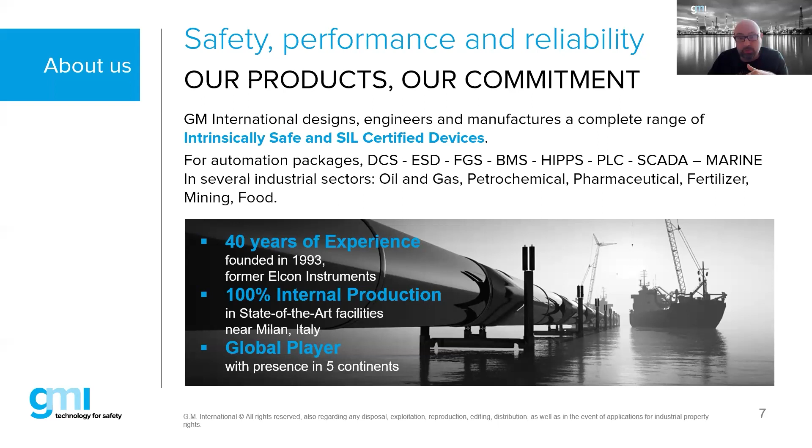We have 40 years of experience in the field. The headquarters is in Italy, where we have our main facility, and where we design, produce, and test all our products.

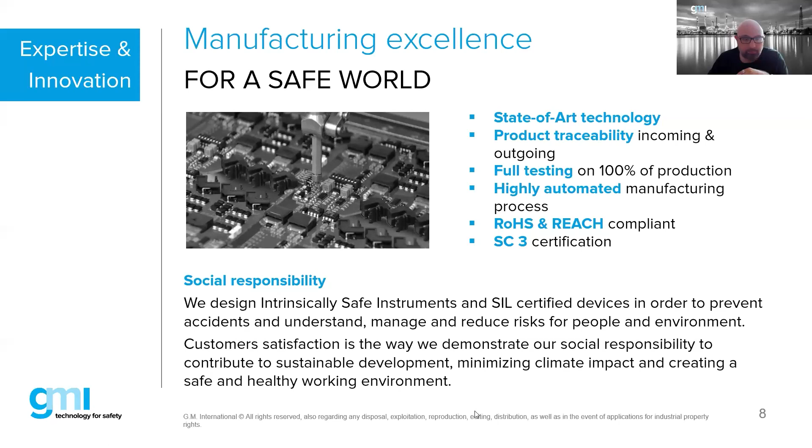Our main office, as I said, is in Italy, but we have offices all around the globe and resellers, so we are available pretty much everywhere.

As I mentioned before, we are a safety company, and we aim to provide safety to reduce risk of hazardous events and safeguard people, assets, infrastructure, production processes, and the environment too. For this reason, the quality aspect of our product cannot be overlooked.

We design our product, we manufacture and test 100% of our devices internally, meaning we do not outsource any of these tasks. What we see here on the screen right now is the portfolio.

Introducing a little bit our products: we have intrinsically safe barriers, safety relays, certified, SIL certified, with and without line monitoring for energized-to-safe or de-energized-to-safe applications. We have isolators, AX power supply systems up to SIL 3. We have temperature and digital multiplexers for zone 1 installation.

We also have customized termination boards for easy connection to the main PLC and DCS systems. We have HART multiplexers, surge arrestors. We also provide consultancy and share our expertise through courses related to functional safety and intrinsic safety.

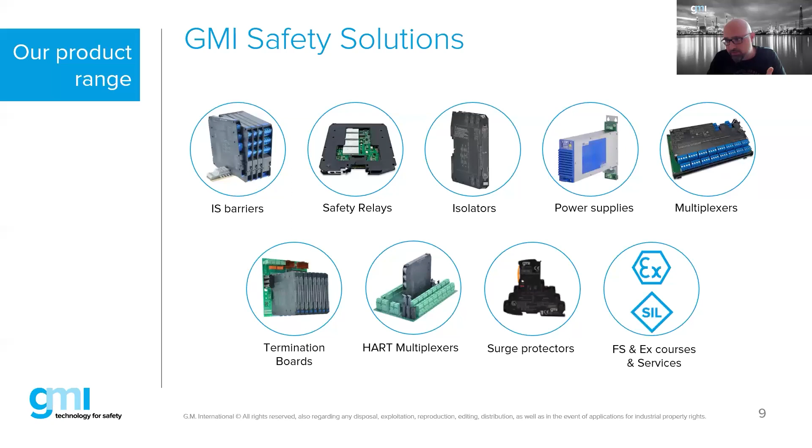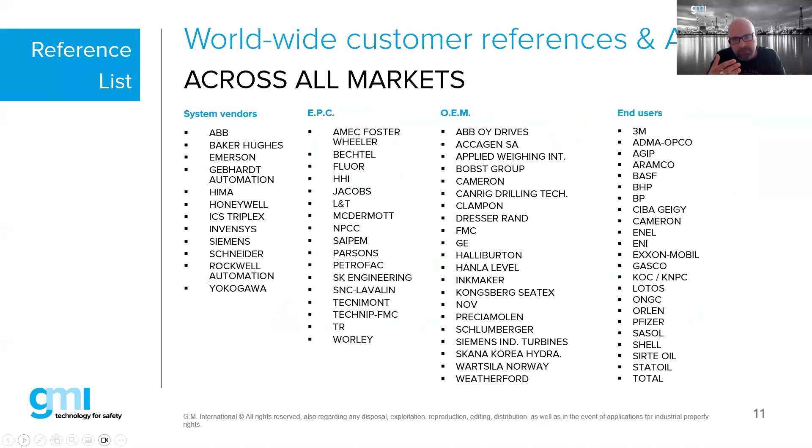This last slide is about our customers, just some of them, from system vendors, EPC, OEM, and end users. And that's all about the presentation of the company.

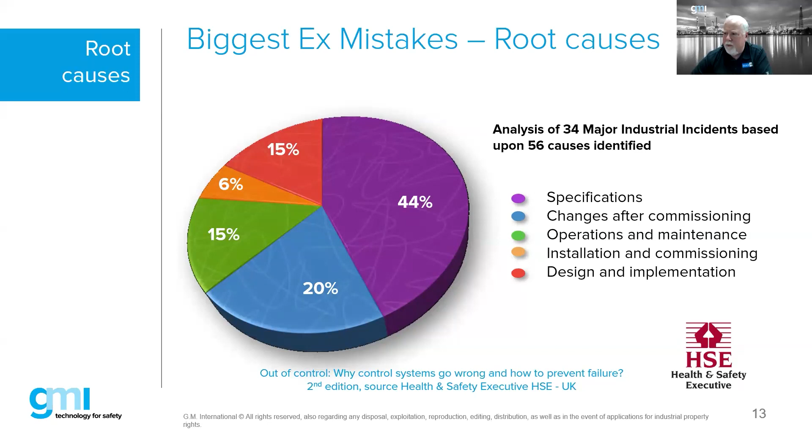So be aware of that. It's one of those things where a lot of the problems I see actually come from very, very early on. We want to make sure we catch those errors before it gets into the construction phase or operational phase. So how do we define mistakes, right?

Fortunately, what do we use as a tool to identify all of the potential pitfalls and problems that we could see with EX equipment? Fortunately, we have a bunch of standards that we can follow, but the 60079-17 standard is really the go-to, if you will, because this is an inspection standard.

So any piece of EX equipment that gets put into service, the requirement based upon the 17 standard is that you have to do an initial detailed inspection on this particular piece of equipment. So that's where we typically find these mistakes—usually at the very last moment before it gets deployed.

We want to try to catch those mistakes, however, before we get to this stage, because this is always, again, when equipment is ready to be installed—it's at the last moment, we're ready to ship this equipment, or we're ready to energize it. We don't want to have these kinds of issues at this particular point in time.

The good thing is that pretty much around the world, regardless if you're in Europe or the international world or in the United States, Canada, anywhere in the world, we pretty much follow the same standard in a variation. Even in the United States, we have published a UL 60079-17 inspection standard. Now, this only applies to zone-rated equipment, but we're also currently working on a new UL standard for inspection of division-rated equipment. So that's something forthcoming that you're going to find.

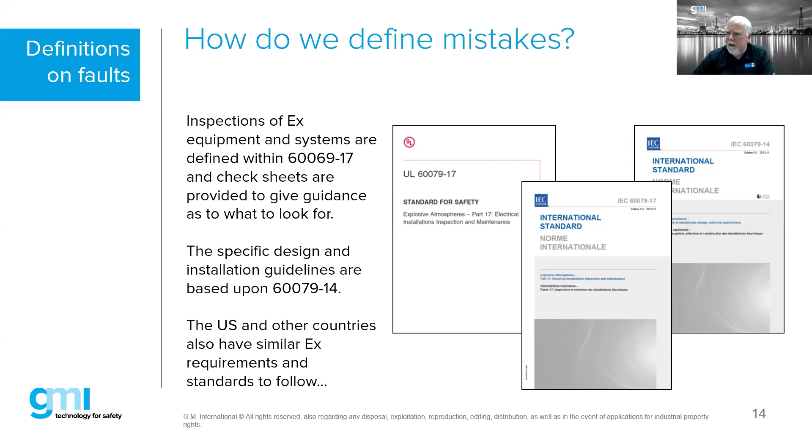So a little bit about what the inspection templates look like, if you haven't seen them out of 17—this is kind of what they look like. There are inspection tables for various protection concepts, and we use these to go ahead and check things out.

Now, an EX inspection is different than a traditional FAT or something of that nature. In an EX inspection, what we're really trying to find is whether or not the equipment is a potential ignition source. When I'm going in and doing an inspection, I don't really care whether or not the equipment works—that's secondary to me. If it doesn't work, hey, it doesn't work. As long as it's not an ignition source, my job is okay, but that's not necessarily what you really are wanting to do. You want to make sure, obviously, the equipment is operational, and that it's safe to be used in a hazardous location.

So the important thing to note on this too: is it just the inspectors that need to know this? In reality, I tell people no, it really should be something that everybody should understand, because this makes life so much easier, especially if you're building skid packages or you're responsible for the design of these packages.

You want to know what the inspectors are going to be looking at so you can anticipate that, and maybe actually do your own inspections and catch all of these mistakes before they get caught by your client or another third party.

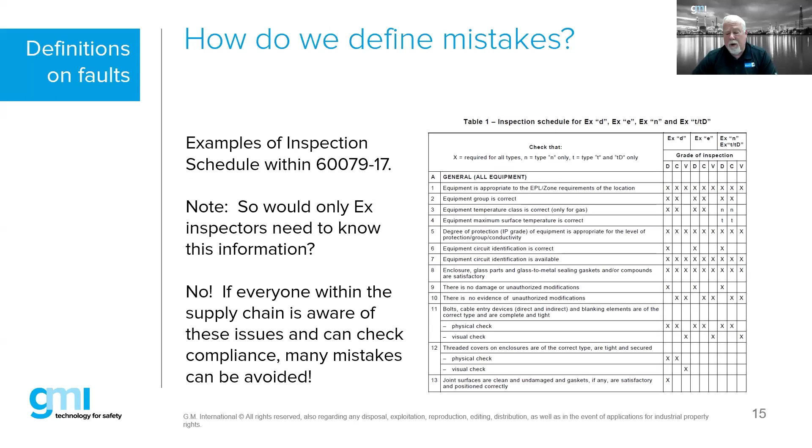It's broken down into visual, close, and detailed inspections. Typically these initial inspections we do are always what's called a detailed inspection, meaning we're opening up the equipment, looking inside and outside. We expect the individual doing this should have an electrical background. There are also ongoing inspections from a maintenance perspective, which can be a visual or close inspection, where we're just literally looking at a product for obvious damage. That's more of an ongoing situation.

So what's one of the biggest mistakes I see? This is one that's pretty obvious, something we'd think we should all catch, right? But invariably, I've seen this so many times, where the equipment is not suitable for either the zone, the gas group, the temperature code, or the ambient. A lot of that information doesn't necessarily get relayed early on in a project scope, so the manufacturer is trying to comply and they're guessing. We need to make sure we get this information out to our vendors and make it very clear.

What is it about this particular equipment? Where's it going? Is there a minimum IP requirement? Are there particular environmental conditions? One thing I see a lot is ambient. The standard product ambient is -20 to +40. If equipment is not marked, that's the default. But in many parts of the world, up north where it gets really cold, -20 can get down to -30. And +40 degrees - it'll be above +40 here in Houston this afternoon. So if I've got a project in the Gulf of Mexico or anywhere in South America, +40 just isn't going to cut it. We have to pay attention to that too.

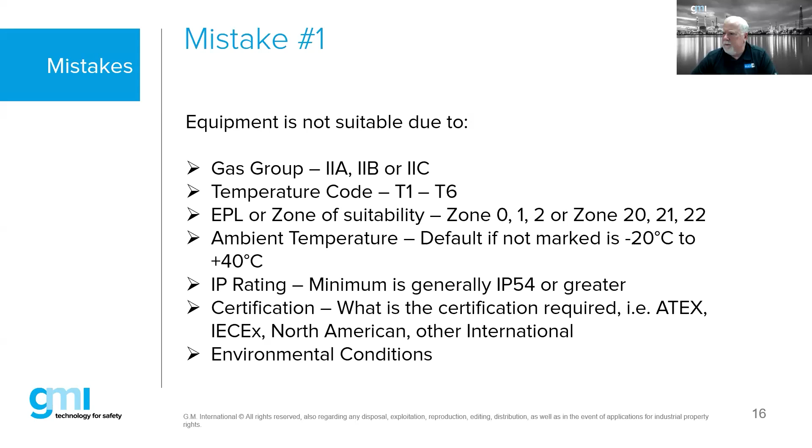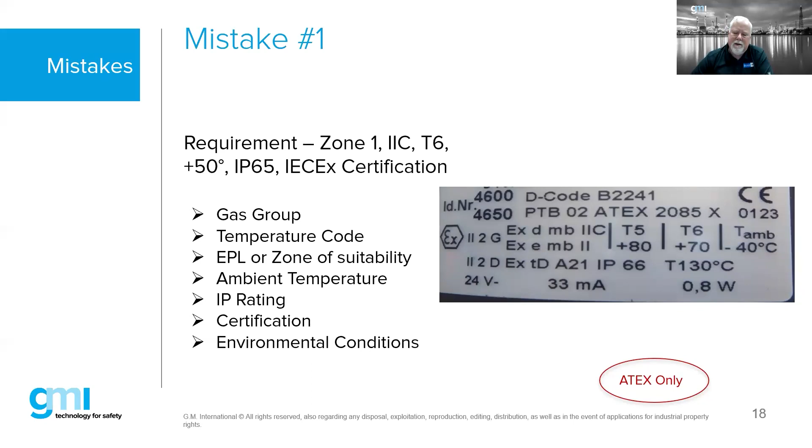Looking at another label, again using the same basis - Zone 1, IIC, T6, +50 degrees, IP65, again needing IECEx certification. There's a couple issues here - actually ATEX is the main issue. We don't have IECEx on this. We're suitable for the zone, suitable for the gas group, suitable for the ambient temperature, and suitable for the temperature code. But again, in this instance, it's not certified correctly for the application.

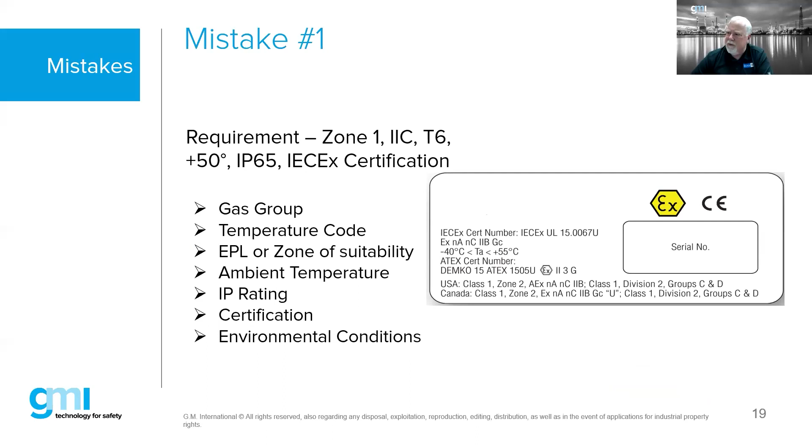In this instance, again using the same basis for our project, this product has a couple issues. Number one, it's only suitable for Zone 2 applications based on the protection concepts. It's only suitable for a IIB application, not IIC. The big thing is, in this instance, this is a component-certified product - we know that because there's a U at the end of the certificate number. That means this product cannot be installed as a complete assembly, it's part of something else. So if I see this, it's again a product that would have to be removed, or undergo some sort of field evaluation and recertification. We want to stay away from this and not use it unless it's part of an overall assembly that's going to be certified as a complete assembly.

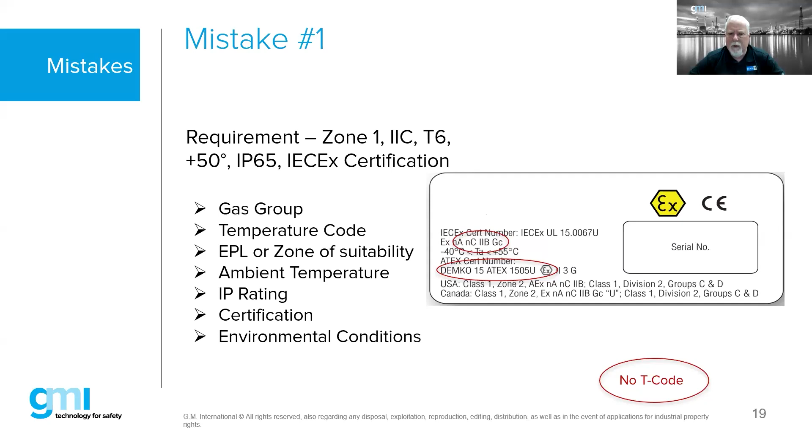Another hint: when you see a product that doesn't have a T code, such as this one, that means it's generally going to be a component certified product. We don't assign it a T code because we don't know exactly how this is going to be installed, since it's going to be part of something else and may have other components right next to it. Therefore, the T code isn't something we'd put on this product because it's a component.

On this one, we need to look very closely, but we have some issues. In this case, it's not suitable for IIC applications, and it's not suitable for T6. It does have an IECEx certification, it does meet IP65, and it does meet plus 50, but we have two strikes against it. So in this case, again, we could not use this particular product.

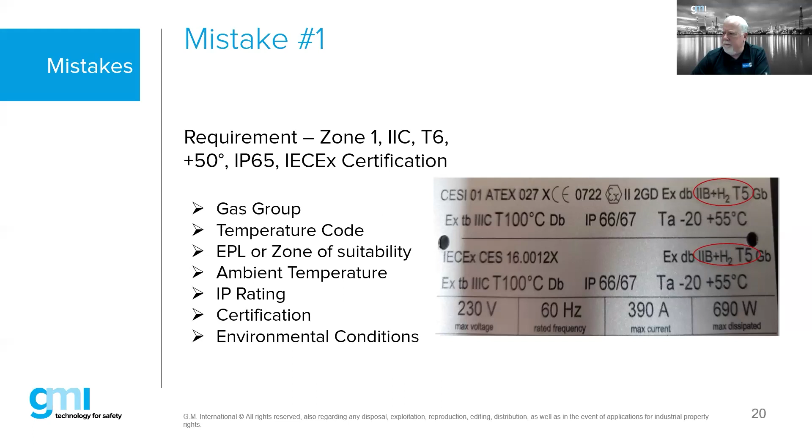So these are all examples of products that could be selected, installed, and everything else, and at the last minute we literally say, hey, this is not suitable for the environment. This is a pretty common mistake, and it's something no amount of field technicians doing installations could fix. This is done very early on, during the selection of products. We have to be very aware of our parameters and make sure our products are suitable before we even start installation and construction.

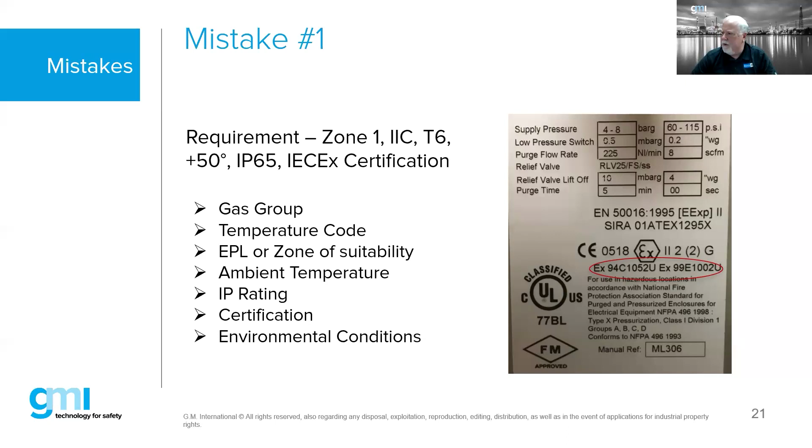And then this is just one last one. Again, no IECEx certification. In this case, it's got ATEX, and it has a U certificate. It's a component, so again, we could not use this.

I do have another one here. This is ATEX only. This has nA. It's Zone 2 only. So again, we would not be able to use this for a couple of different reasons.

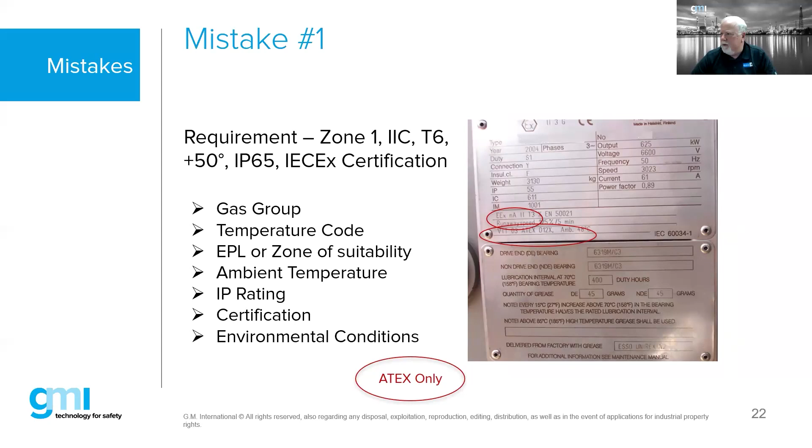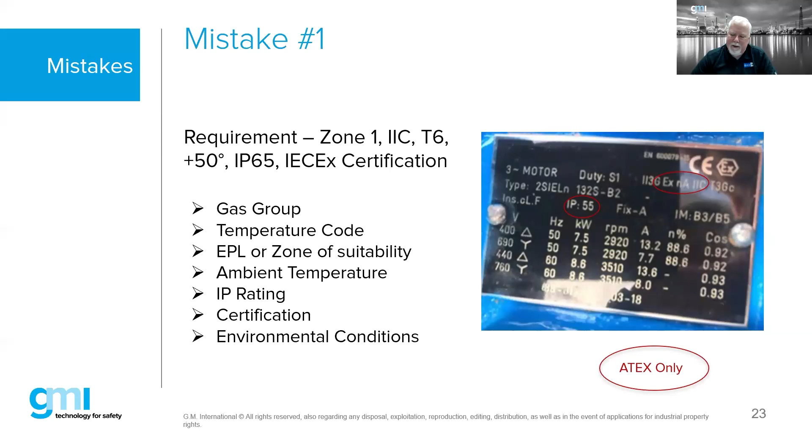These are things we need to take a close look at. I've got another one, another Zone 2 product. This IP rating would not meet the requirements as well. So you can see it's important to understand these labels, and you're going to find all this information in the data sheet from the equipment and ultimately off the certificates.

That's really an important thing I would emphasize to any engineers or designers out there. Before you actually buy anything, make sure you get copies of certificates, because there's a lot of information in there that will tell you certain things. And actually, it's going to be a mistake that I'll cover here in just a minute.

So what is the relevant standard for inspections of EX equipment and installations? I don't know if you can bring up the poll, Gabrielle, or not, but we can skip that.

It is the 60079-17 standard, so that's our inspection and maintenance standard. That's the one where we're going to find the inspection tables. The other relevant standard, important for a lot of people to understand, is the 14 standard. That standard is our design and installation standard, and we will find inspection tables also within 14. But really, 17 is the main standard we want to focus our attention on and make sure that's something we use.

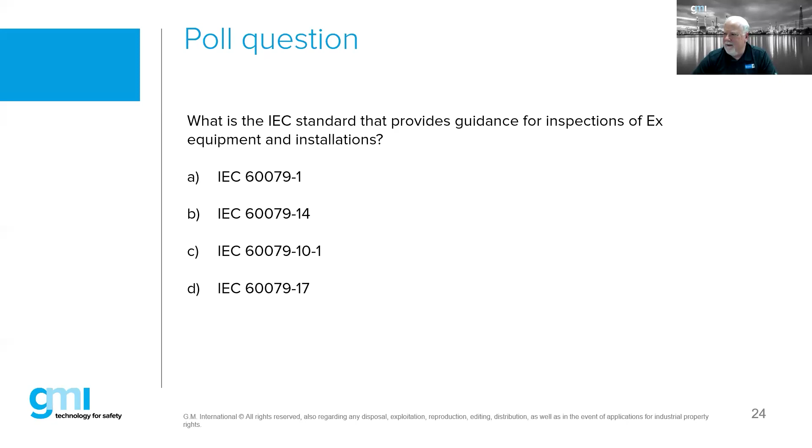So moving on, let's look at, if I can get this to move. Oh, I don't know if it's doing anything. There we go, it did move.

Mistake number two, the second biggest mistake: modifications into EX equipment outside of what is allowed. One of the things I see an awful lot of is additional entries drilled into EXD enclosures. That is a no-no. It cannot be done in the field, it can only be done by the manufacturer.

The other thing is additional components installed in an enclosure, and this applies not just to EXD enclosures, but also to other EX enclosures, because when we get them certified with a certain set of components on the inside, we're assuming those are going to be the components used, and we're going to develop a temperature code based upon this.

If we take and all of a sudden add an additional power supply, or add an additional contactor on the inside of an enclosure, that's going to generate more heat, which potentially violates our temperature code requirement. Also, depending on the placement of this equipment inside, for example, an EXD enclosure, we could introduce what is called pressure piling, a situation in which we have an explosion on the inside of a flame-proof box, but because of the orientation of the components inside, we're blocking an explosion from taking place, creating a potential secondary explosion that can be that much greater than the first.

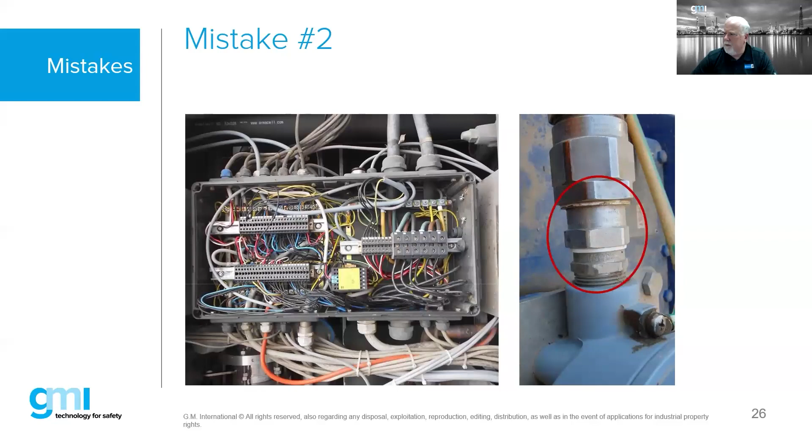Looking at our next slide, if I can get this thing to work—oh, there we go. Now we look at this particular one and say, hey, it all looks good, everything looks fine. However, just by looking at this, those particular glands are not barrier glands, and that may or may not be an issue.

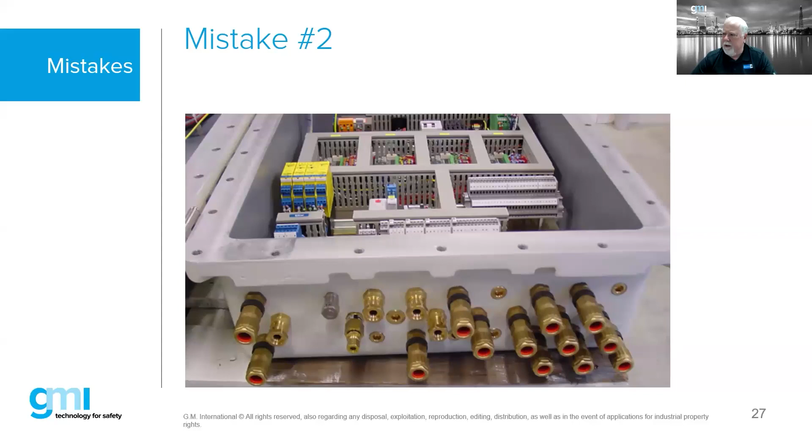So we have to understand, this is a flame-proof panel. What type of cable is being used? What is the length of cable? What is the requirement under the Dash 14 standard with regards to the type of cable, and whether or not we have to use a barrier gland or a non-barrier gland? We don't know that just by looking at this panel right now. We need to know further, as far as the length and type of cable, to determine whether those flame-proof glands are acceptable. So again, just by looking at it, it looks fine, but we're not really 100% sure until we truly look closer at the details.

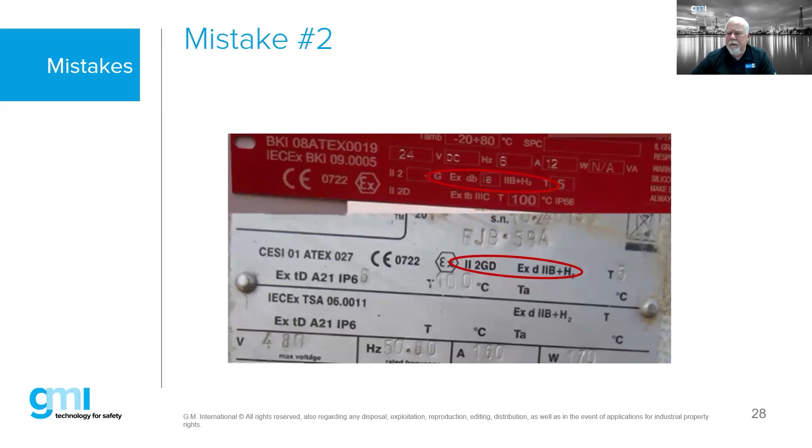And generally speaking, because it's not marked with a bracket IA as associated apparatus output, I'd say, hey, no, this is not right. We'd have to reevaluate it, potentially recertify this panel. So these are little things that you really have to key in on sometimes, and they can kind of trip you up. We want to make sure that we catch this stuff before we start buying things and specifying things.

And by the way, one thing about shrouds, a lot of people - this is more of an opinion, right? I would highly recommend against using cable shrouds, because they have a tendency to hold moisture in against the cable gland. And what will actually happen is that it holds that moisture in, and it'll start eating away at that gland, accelerating the corrosion that'll take place in a marine environment, for example. So typically a lot of clients have gotten away from using shrouds.

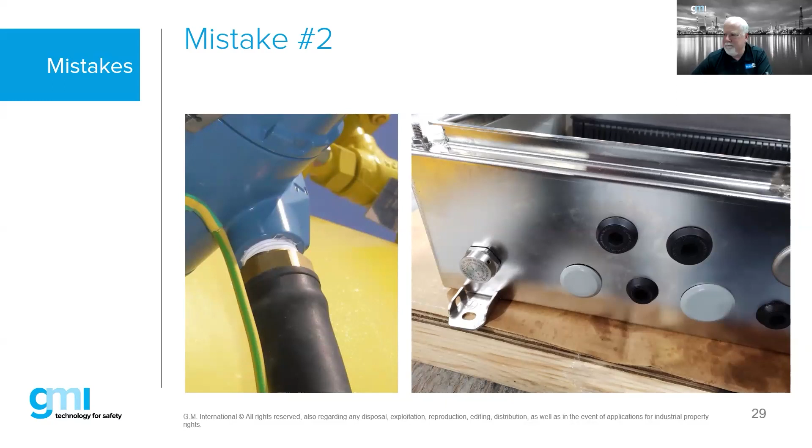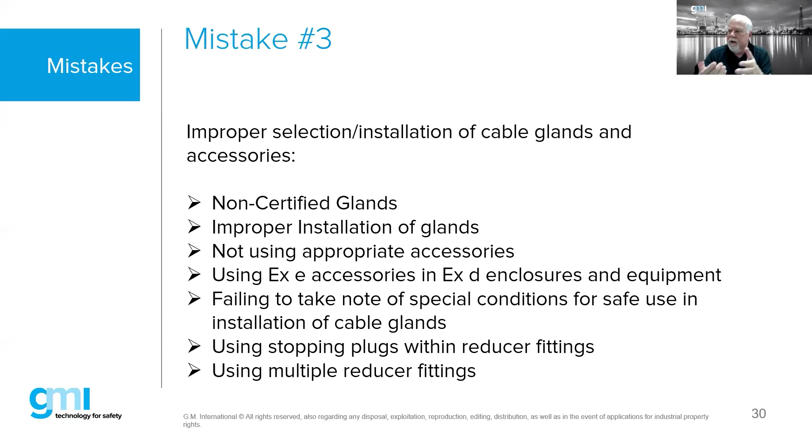Mistake number 3. This does come into a lot of installation details: non-certified glands, improper installation of glands, not using the appropriate accessories, maybe using EXE equipment accessories in EXD enclosures, failing to take note of special conditions for safe use, using stopping plugs within reducer fittings, or using multiple reducer fittings. These are all issues we want to stay away from.

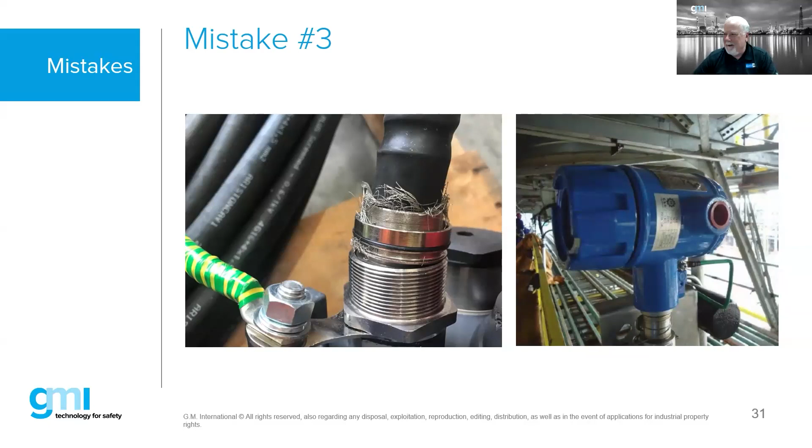On the right-hand side, you see a transmitter with a little red stopping plug. That's a traveling plug that should have been removed during installation and replaced with a certified stopping plug. Those are not too uncommon - we see stopping plugs like that on a lot of equipment. Fortunately, that's an easy fix.

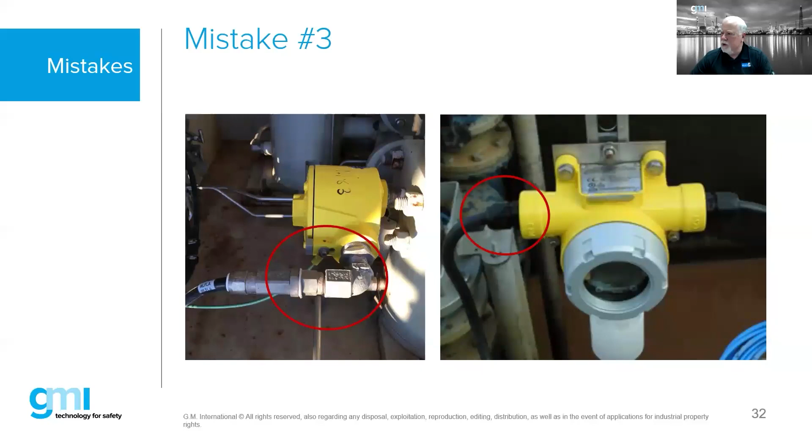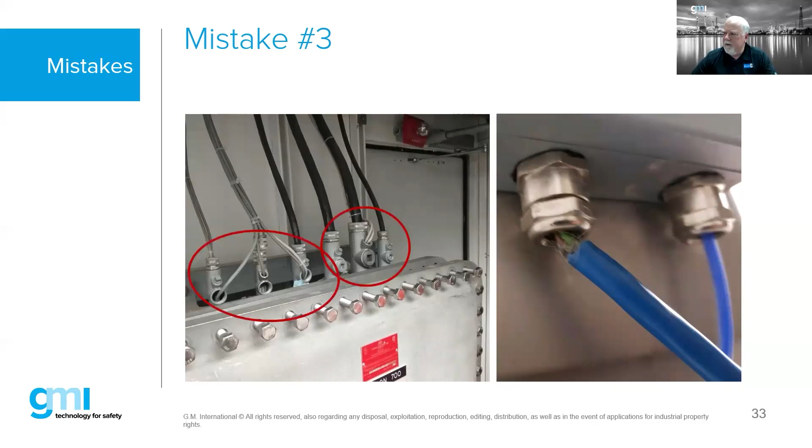In this case, on the left-hand side, those are stopper boxes, or what we call here in the United States seal fittings, and obviously have not been installed properly. They actually require being packed with a compound, a cement-type compound that cures around the individual cores, and they obviously have not done that. And then obviously a cable that is pulling out of a cable gland - so again, these are definitely some installation issues.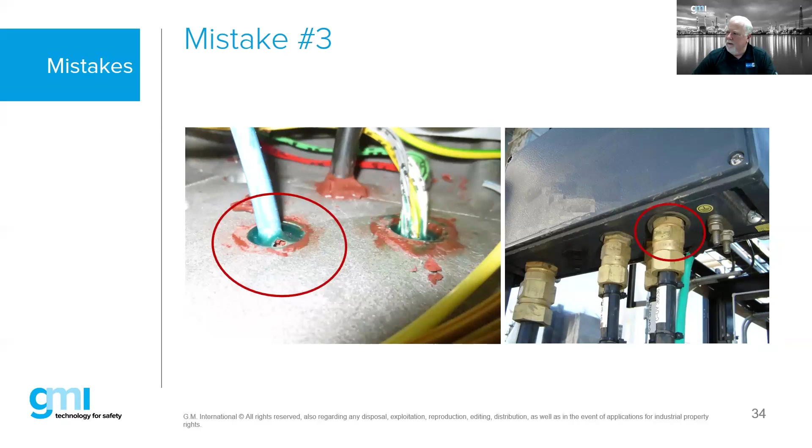So again, some of these are pretty minor. They don't necessarily pop out at you, but these are the things you want to be looking at. Obviously, on the left-hand side, the gland is pulled out. On the right-hand side, we basically have not landed the armor on the inside of the glands. So those are definitely some issues.

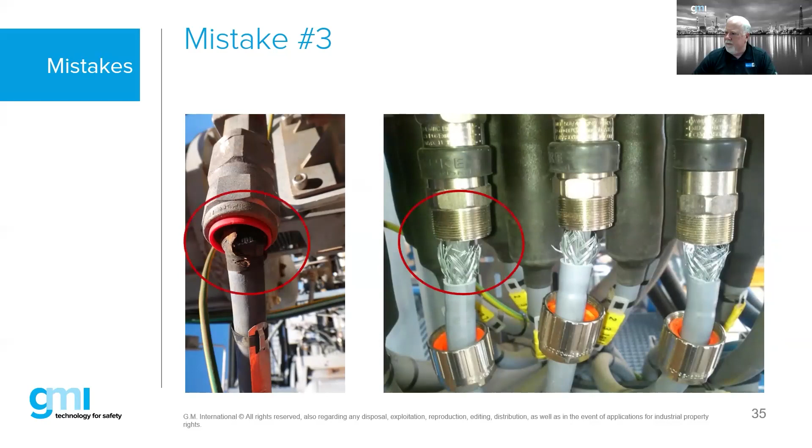Looking further at some others, on the right-hand side we have a shroud that's covering up the steel wired armor coming out. On the left-hand side, I'm not really 100% sure what the problem is with that one. It looks as if everything is okay. We have an IP washer in the appropriate place, we have an earth tag, and it looks like we have some sort of adapter going in there as well. So it may be a situation where we should put an IP washer between the earth tag and the adapter, but in reality, I think that's actually an okay situation.

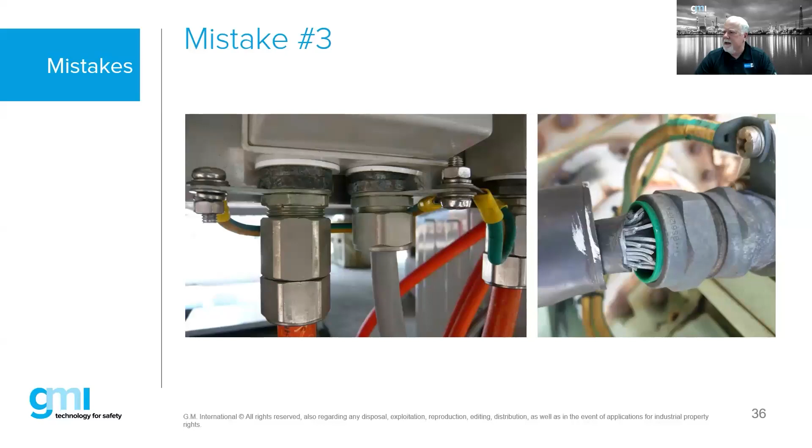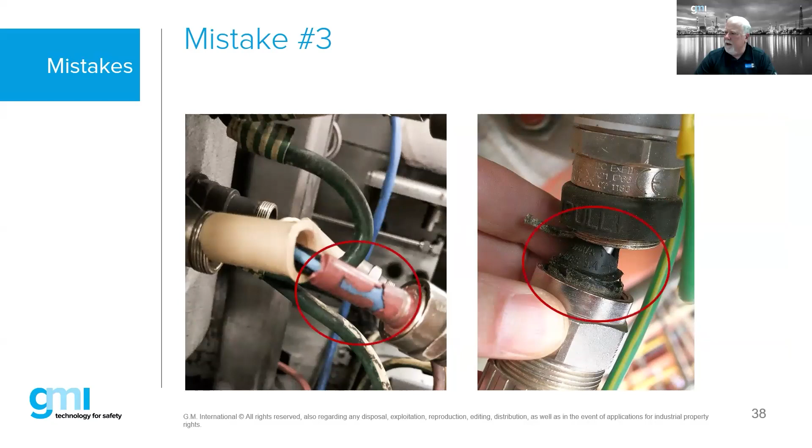And again, some other things, some other glands - these are just some real world pictures that you would see. And then, of course, barrier glands in which the compound isn't properly cured, or maybe the internal seals get torn. These are all kind of examples.

Just ask this question: can you use an EX certified stopping plug in conjunction with an EX certified reducer fitting on an EXD enclosure? Here's where we're taking a stopping plug - maybe we have a hole in a flame-proof box that's, let's just say, an M32. And I have an M20 stopping plug. I don't have an M32 stopping plug, but I have an M32 to M20 reducer, and I'll use that, and then put a stopping plug into that. Is that acceptable? The answer is no. I cannot, on flame-proof boxes, take a reducer and a stopping plug and combine them. I can take a reducer adapter with a cable gland, but if I ever use a plug, the plug needs to be the actual size of the hole of the enclosure.

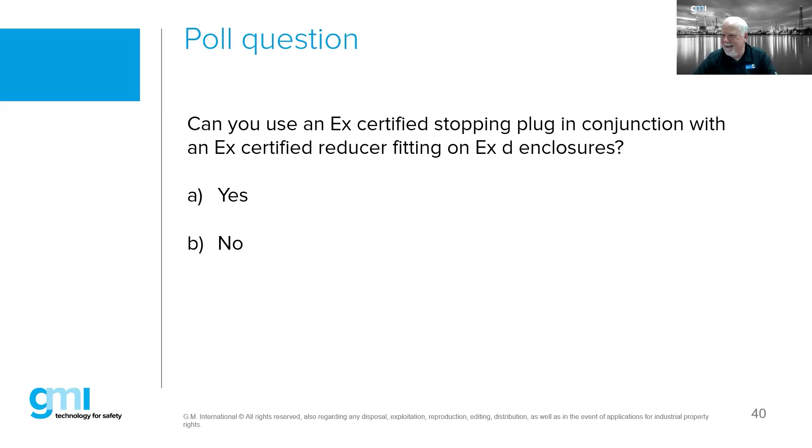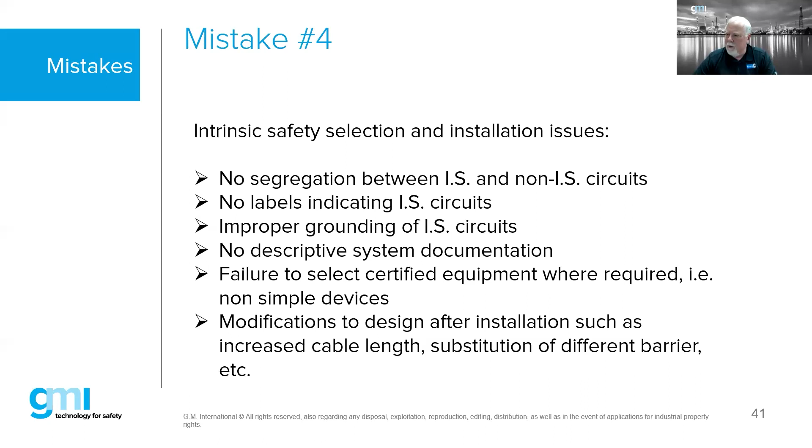Here we go, intrinsic safety - the mistakes on IS. There's quite a few if we get into IS: no segregation between IS and non-IS, no label indicating IS circuits, improper grounding of IS. There is no descriptive system document. There's failure to select certified equipment where it's required. For example, we can use what are called simple devices in IS circuits all the time - they do not require certification, but if the device is energy storing, then it has to be a certified device. And then modifications to design after the installation, substitution of different barriers, or maybe increasing the cable length - those are all issues with intrinsic safety that we need to be concerned with.

So what you see on the left-hand side, again, we have what looks like a combination of intrinsic safety and non-intrinsic safety. We had a partition, with IS over on the right-hand side and non-IS, but unfortunately, when they did the installation, they combined all the cables together. So we have defeated that segregation requirement.

The same thing holds true on the right-hand side where our outgoing is IS and our incoming is at the top, but we've done a service loop on the inside of this panel, and now all of a sudden we're creating all kinds of problems. So we need to maintain a 50 mm separation between IS and non-IS on the inside of our panels. We can do that either by distance, by partitions, or if one or more of the cables are shielded, we can do it that way as well. But in this case, these are just non-shielded conductors running on the inside of panels.

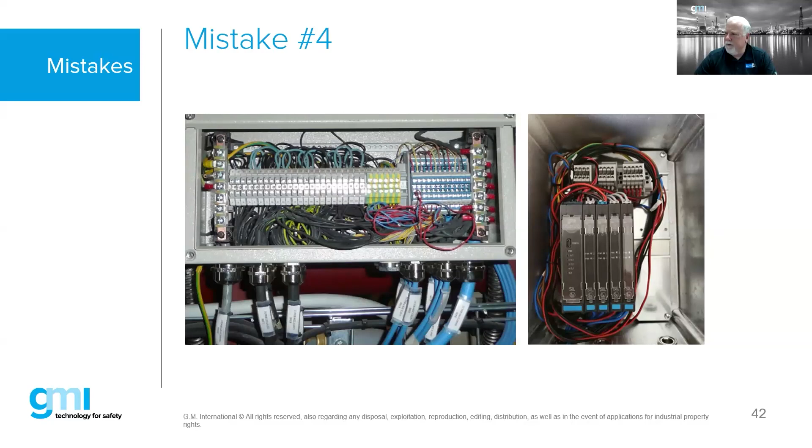And there you see those. On the left-hand side, again, we're running into that 50 mm separation. The same thing holds true on the right-hand side. We have a segregation there between IS and non-IS, but we've somewhat defeated that because of the way that we run these cables outside the output, out of the barriers themselves.

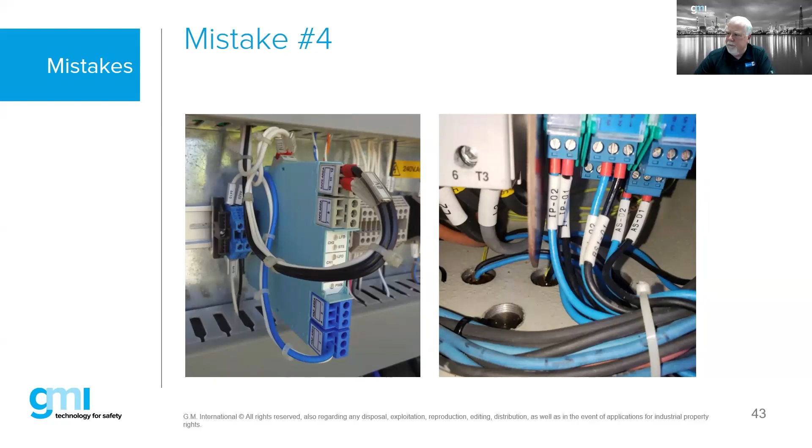There's no real problem with this, other than it's not certified as an assembly. It's only certified as a component. So this is something we want to make sure of when we're specifying or using things like increased safety—we want to make sure we get them as a complete assembly and not just an empty enclosure, thinking we can populate it ourselves and away we go, because that's typically not the case.

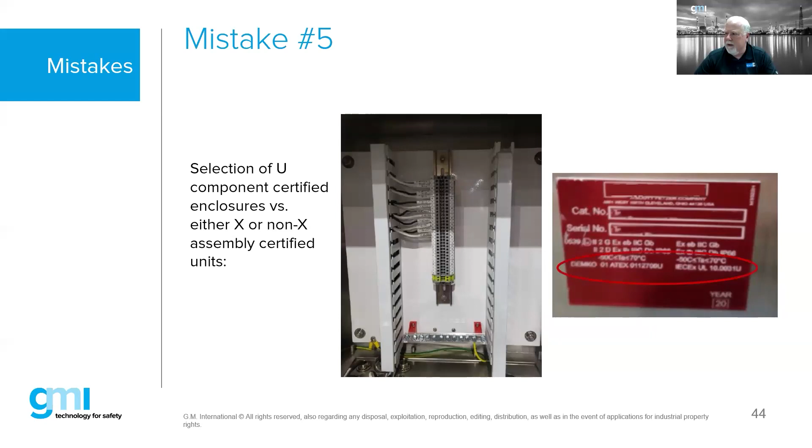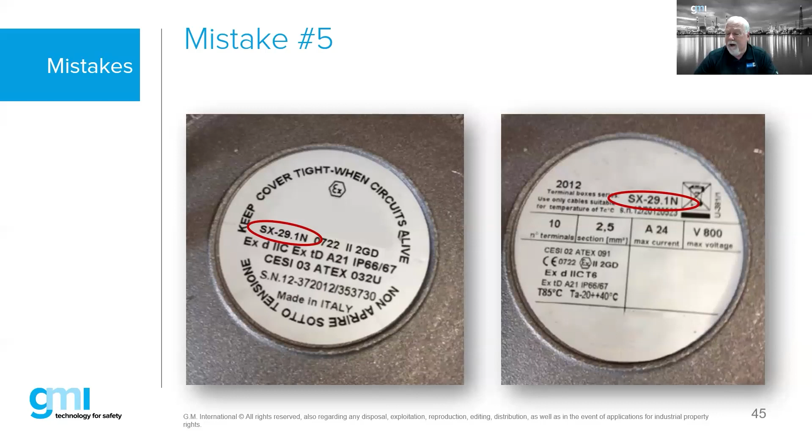This is another example of two small flame-proof boxes that are basically the same part number, but the one on the left-hand side is actually a component certified product. The one on the right-hand side is the same box, except it has terminals. So the right-hand side will actually have a temperature code and a certificate number without a U. The one on the left-hand side, notice it does not have a temperature code and it has a U, so that's an empty enclosure. The one on the right-hand side has terminals. So if we were using this box as a pull box, just not having to put any terminals in it, we could use a U certified box for that application. But if we were to land any terminals on the inside of this enclosure, that U certified box would be rejected.

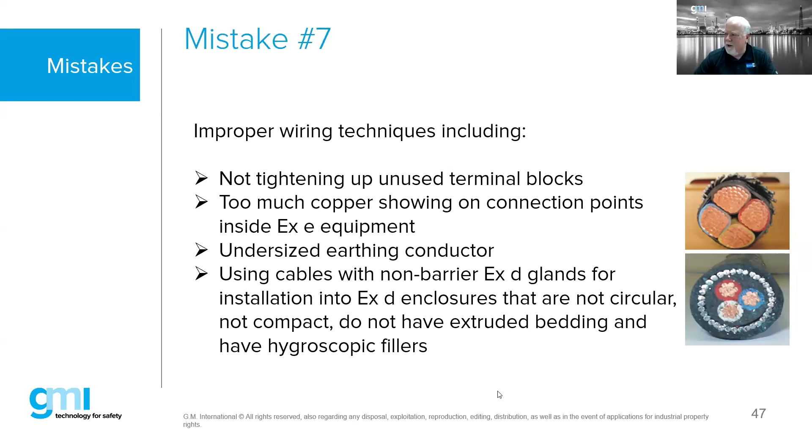Improper wiring techniques. Unused terminal blocks are all supposed to be tightened. Too much copper showing on connection points inside of EXE enclosures. Undersized earthing conductors. Using cables with non-barrier EXD glands for installation on EXD enclosures that do not have the cable construction that meets the requirements.

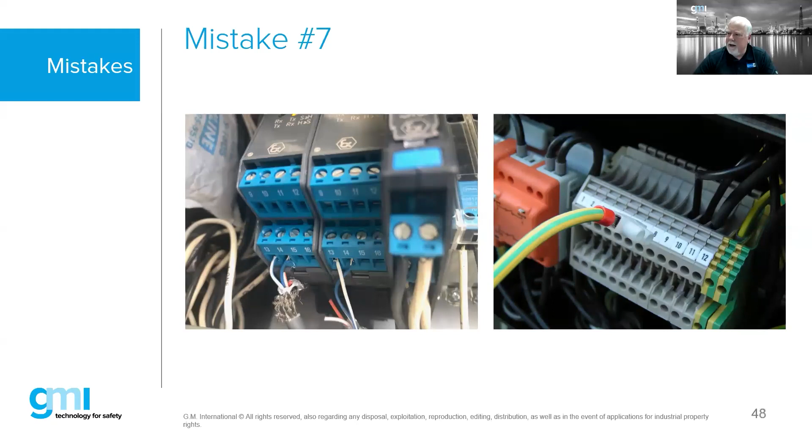So on the left-hand side there, we see some conductors that are going into some GMI barriers, but obviously they're not landed very well. We have stranding there, and that's not what we want to see.

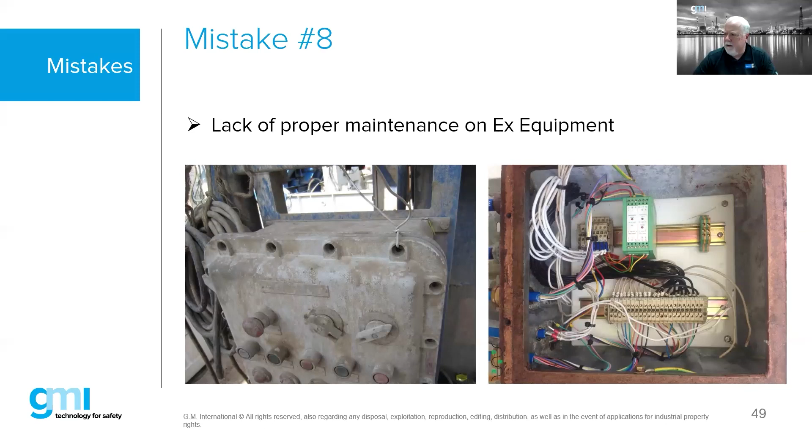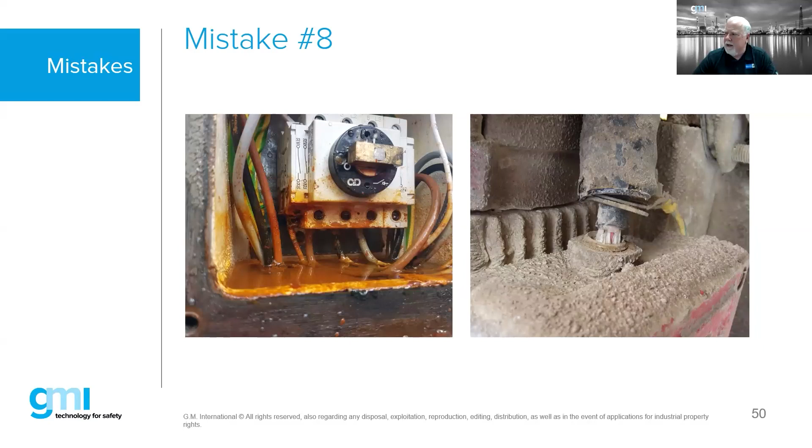And obviously, where we have things like water ingress, we want to make sure that we address that. On the right-hand side, we have a broken gland, so again, we have to be aware of that. And that was covered up by a shroud, right? We can't really tell a lot of times if a gland is broken or not until we actually remove the shroud, and then we find there are problems. That's another reason why I don't like shrouds, because we can't see the problems.

And our last mistake, earthing of intrinsically safe Zener barriers. I did an inspection here about a month or so ago in which they had some Zener barriers on a marine vessel, and on a marine vessel, as you might imagine, trying to find clean earth on a ship is very difficult.

You typically would not find any clean earth, and they tied it into the earth point that was marked as clean earth that was literally about 1 meter away from the dirty earth, tied into each other by a metal plate. So there was no clean earth.

So Zener barriers do require a clean earth, and so we have to be very careful when we're using Zener barriers in particular that we maintain a clean earth. That's one reason, actually, if people ask why GMI does not offer Zener barriers.

Galvanically isolated barriers are truly a safer methodology. They cost a little bit more, but it is a safer product because we do not require that clean earth. And the reason why they cost a little bit more is that you actually have to have some sort of transformer on the inside of these barriers to replicate the signal going from the safe area to the output to the hazardous area.

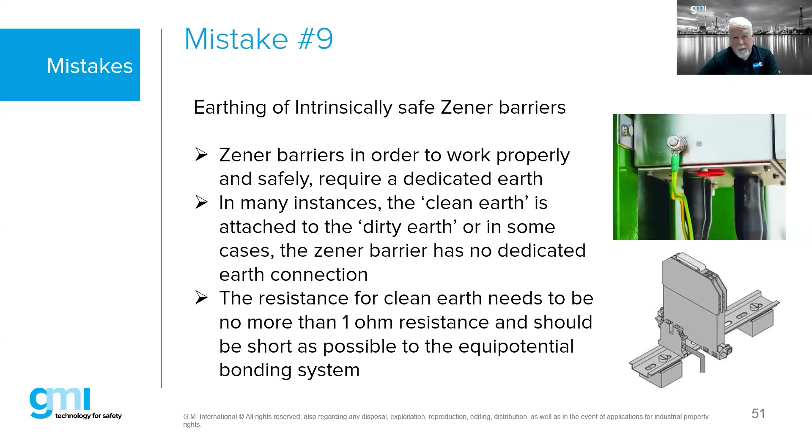Again, the downside of a galvanic barrier is they do cost a little bit more, but the upside is you don't have to worry about the clean earth. And that's a big issue.

So what letter will signify a component certificate? That's going to be a U. So if we see a U at the end of a certificate number, we know that it's a component. If we see an X at the end of the certificate, there is some sort of condition for safe use. And we definitely want to look at that because it's telling us that if we want to apply this product, we need to make sure it's installed in accordance with whatever those conditions are.

I'll give you one example, cable glands. In many cases, cable glands will have an X condition, meaning they're suitable for fixed installations, meaning I can't just put it on a portable piece of equipment.

But there's another X condition that applies to certain glands as well. It may require a clamping within 300 millimeters of the back end of the gland to provide strain relief. Now, not all glands have that, and it's not necessarily with all cable types.

If you don't know that and you go ahead and do an installation and somebody comes along and looks at the X condition and says, hey, you've got 100 or 200 glands here that are installed, and you didn't follow the X condition and you need to clamp this...

In many cases, it could be very simple. I could put a cable tie or some sort of stainless steel band, attach it to the structure. But what if there's no structure? So now all of a sudden I have to take some strut or welded steel and actually build a structure to be able to clamp it in some way, shape, or form.

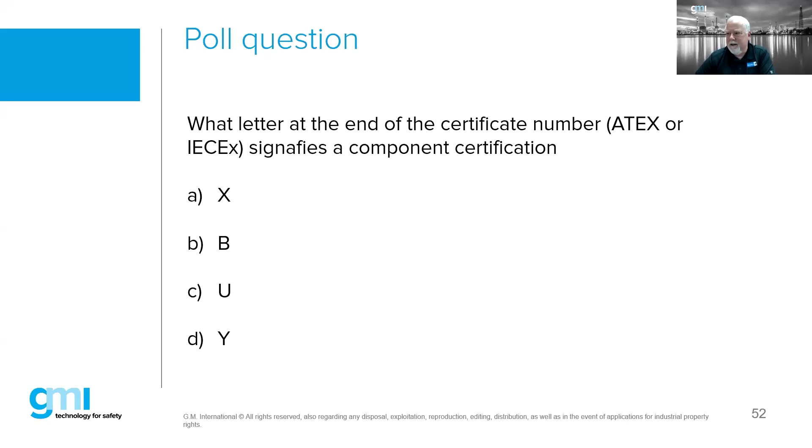So those are the kinds of things that we want to pay attention to before we get into the construction phase.

So to kind of summarize here, we do have some Q&A questions. Mistakes can happen at any point, right? It's not just the installation or the installers and the operators. It can be done at the engineering level, and we need to make sure that we catch those early on. These are just some of the ones that I've seen, and I'm sure there's some other ones that you've probably seen or experienced in your own work.

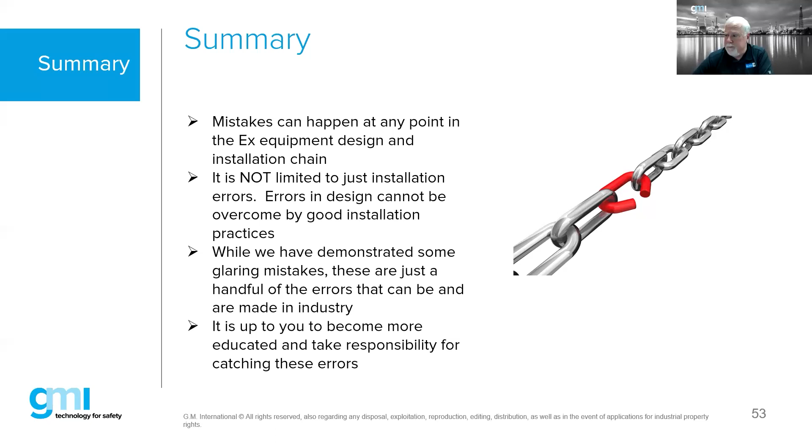But the important thing is that we want to do everything we can collectively, no matter what our role and responsibility in the EX chain, is that if we have a breakdown anywhere within this chain, either at the engineering level, procurement level, installation level, or management level, then we could have a potential dangerous situation. And we don't want that. We don't want loss of life, loss of property, because this is a safety critical issue and a safety critical industry. So we want to catch those errors, right?

All right, Gabrielle, you want to put up the Q&A real quick? Yes, let me stop sharing for a moment. You there? Yes, stop share. Now I wanted to check if we have... if you don't have it, I think I have it. No, I have it. We have something in the Q&A, but it's still people that are hearing or not hearing us, but everybody seems good now.

There was one question that's come in while you get that going.

In IEC Ex, simple devices like an RTD or a thermocouple that has North American XP marking, can we change the terminal blocks with IEC Ex approval, or does putting an IS barrier work? Is there other options? If I have a simple device, here's one, as a simple device, a thermocouple, a lot of times we'll put those in a box that will be maybe a US certified explosion proof box or something like that, or an internationally approved flame proof box.

In reality, what I would suggest in that scenario is that it's not actually required to be an explosion proof or flame proof box if it's being protected by an intrinsically safe barrier. A barrier would work for that application, but what we would want to do is put a label on it to say something to the effect of, this is a simple device being protected by intrinsic safety with well-defined parameters. That will make an inspector say, okay, great, I don't have to worry about the fact that this isn't a UL certified box or a flame proof or explosion proof box, since I'm using it in conjunction with intrinsic safety. So a simple device does not require flame proof or explosion proof, it just requires a housing. By putting that label on there, that's going to take care of it.

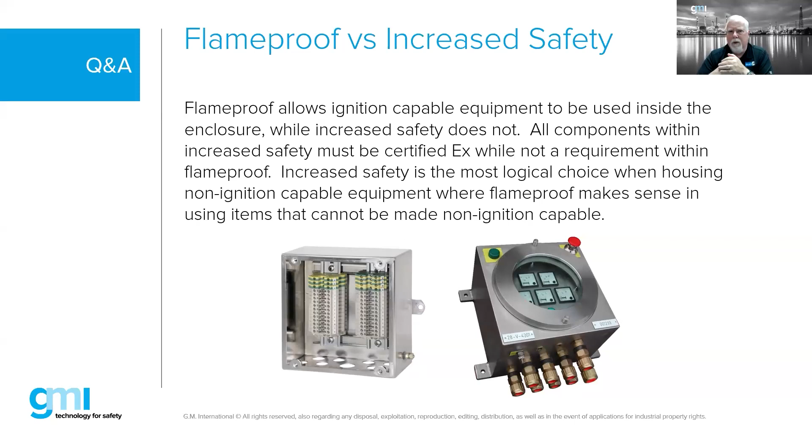But we have to be wary, we can't just take those devices and stick them inside these boxes unless the enclosure allows you, under its existing certification, to do that. You don't want to just take maybe an encapsulated relay, or switches and pilot lights and operators, and start punching holes and putting them inside increased safety enclosures, because it's not certified for those operators. You have to double check and make sure that's allowed. Again, in those cases, you can certainly find increased safety boxes where operators and various other devices are readily available, but you just can't necessarily do it yourself. Again, on flameproof, we can put all kinds of ignition capable equipment inside; increased safety, we just cannot. That's our big problem.

Why must we use Ex equipment near industrial furnaces which have a source of an open flame? It's an interesting question. So we assume the area classification documentation requires Ex equipment near the open flame source, but the source of release is far enough from the open flame and would potentially be below the lower flammable limit once it gets closer to the open flame. So there must be some ventilation of some sort, maybe natural ventilation or artificial extracting, so we could have fans drawing any potential flammable gases and vapors away from that. We may also be required to have a gas-free permit or gas sensors near the furnace to monitor at all times, set for usually about 20% of the lower flammable limit of the potential gas vapor being released into the environment. But that's how we would address that.

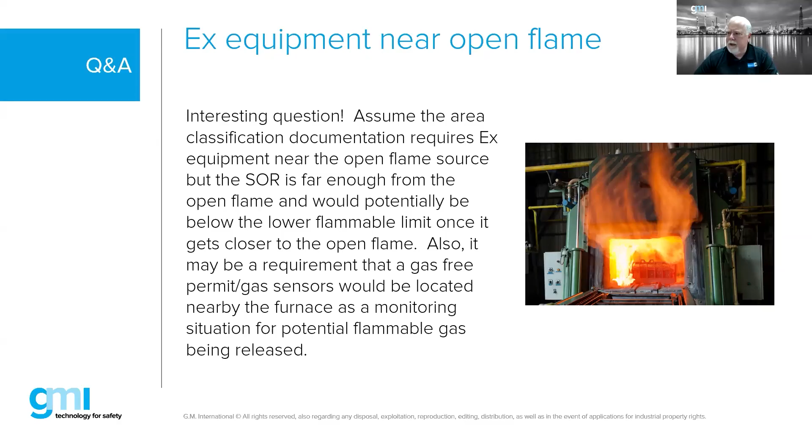Expiration date of flameproof equipment - I've never had that question before, but it's actually an interesting one. Generally speaking, once flameproof equipment is put into service, and this is true really for all Ex equipment, as long as it's still functioning and in good working condition, with no obvious mechanical issue or corrosion or water ingress or something like that, we can use this equipment for the life of a project.

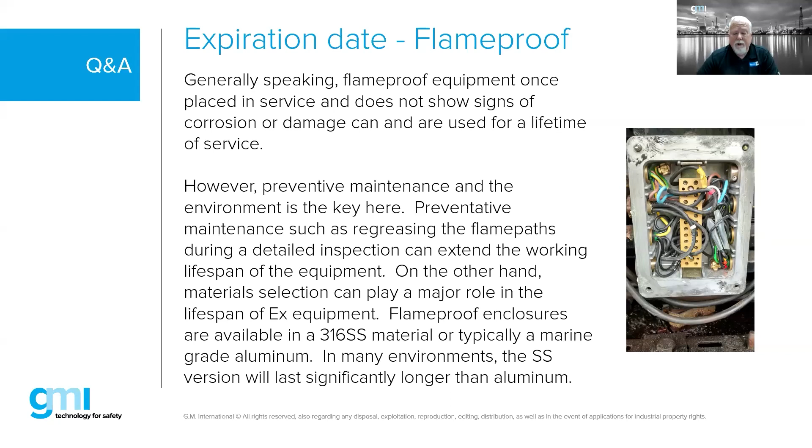There are certain materials that usually lend itself better, so a 316 stainless steel enclosure is typically going to hold up better in a marine environment than maybe a marine grade aluminum, so you're going to get a longer lifespan out of that. But generally speaking, if you maintain it, keep it clean, and lubricate the flame path when you do a detailed inspection, you should get 20 to 30 years lifespan, assuming the corrosive environment isn't so bad, you should get a long amount of service out of it.

And the key is preventative maintenance with these, right? It's just like changing the oil in your engine. You want to make sure you do that. If you don't, then your car is going to break down much sooner.

When selecting EX equipment, where should I find the relevant information as to installation instructions? The manufacturer's data sheets is certainly important, and it's also advisable to obtain copies of the EX certificates from the manufacturer, because that's where you're going to find the conditions of safe use, if they exist, and any limitations associated with that particular product. So that's important to understand. And again, certainly following the requirements of...

60079-14 from an installation and design standpoint is critical. That's not the only design standard, however, you need to be aware of, depending on the markets that you're going into. If you're in the marine business, you may also have to comply with the IEC 60092 set of standards. If you're going into the mobile offshore drilling unit market, you'll have to comply with the IEC 61892 set of standards. Or depending on where you're going in the world, you may have to follow API recommended practices or a variation of the IEC standards. So it's always important to understand.

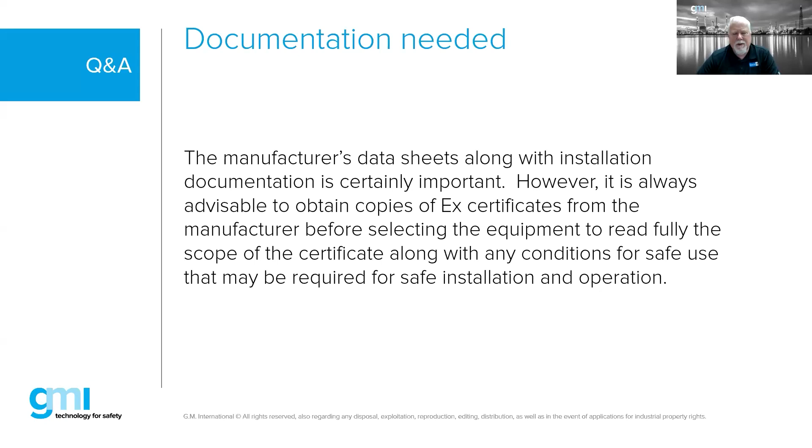The other thing about the standards that I always emphasize is that the standards are a minimum requirement. So the standards will tell you, hey, you do this, you're okay. But in many cases, companies will go above and beyond what's actually in the standards. So first and foremost, you really have to pay particular attention to whatever the project specifications are.

We have a couple more here. I know we run just a little bit long here. How to properly wire our screens.

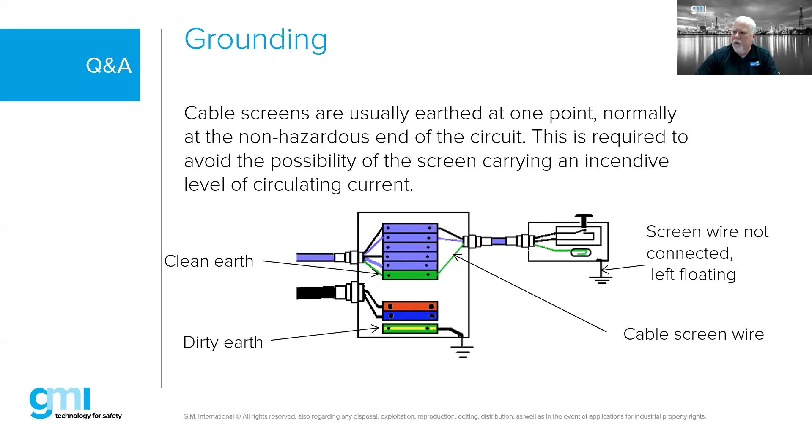They are usually earthed at one point, normally at the non-hazardous end of the circuit. It's required to avoid the possibility of the screen carrying an incendive level of circulating current. So this is typically what you would see with grounding of IS circuits, if you will.

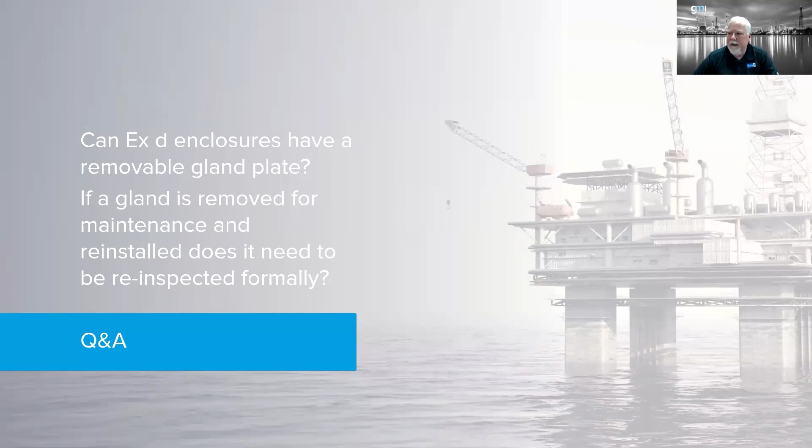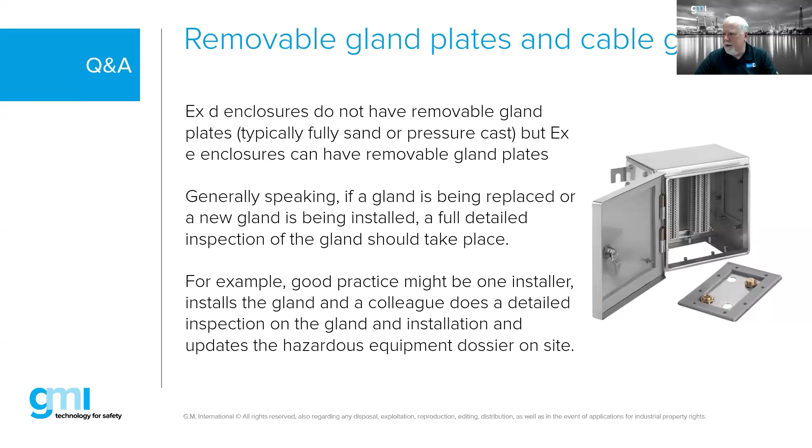EXD enclosures with removable gland plates - is there such an animal? I have yet to see an EXD box with removable gland plates, but EXE boxes certainly have them. And EXE boxes, the whole purpose of a removable gland plate is to make it easier to punch holes. And we can punch holes on EXE enclosures. So the idea here is that if we screw up, then we only have to replace the gland plate as opposed to having to replace the entire enclosure.

So what are the relevant standards used for EX equipment used worldwide? I think I've mentioned this a couple times, but the 60079 set of standards is really the key one to follow. Pretty much everywhere in the world now uses the 60079 standards. Those apply to electrical equipment, but there's also new ISO IEC 80079 standards that apply to mechanical equipment.

So if we're dealing with mechanical equipment in hazardous locations, these are the relevant standards you want to take a closer look at. And again, as I mentioned, the 61892 for mobile offshore drilling units, for the marine business, the 60092 standards. And again, there are some other ones around the world, such as the National Electric Code, the NFPA 70, the Canadian Electric Code, BS 7671 will have some information on hazardous locations. NEK standards, NORSOK, there's a bunch of different ones out there that you need to pay attention to.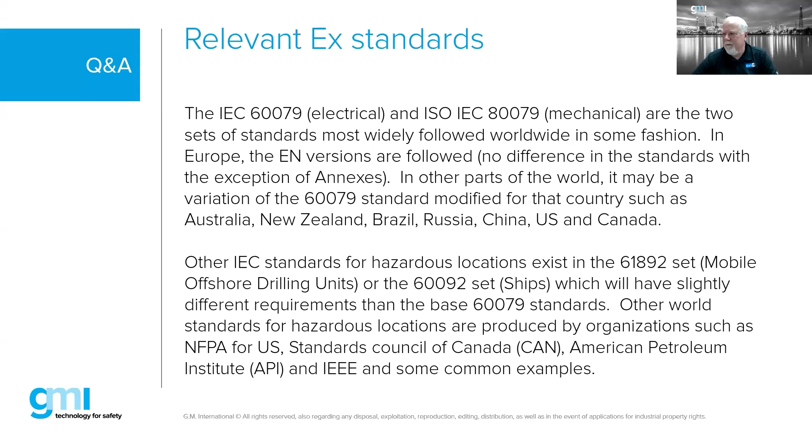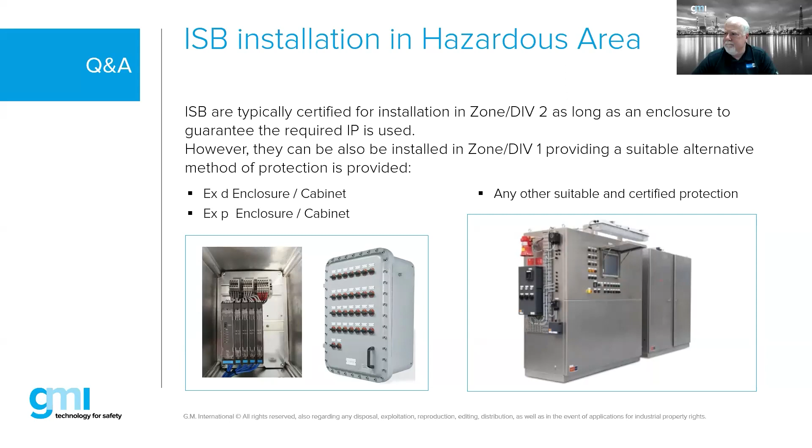Can I install a barrier in the field in a remote area? Yes, absolutely. We can take barriers and install them. In many cases, barriers are rated for Zone 2, and we can actually install them in a sheet metal box. But if we say we need to install it in a Zone 1, then we could take those barriers and install them in, say, a flame-proof enclosure or potentially a pressurized enclosure. So yeah, you certainly can do this. And this is true in the US as well as in the international world.

Small pumps or heaters rated at approximately 300 watts - should the power supply box switch be Ex e or Ex d? This was, again, another interesting question. Hadn't really seen something like this, but generally, anything that is ignition capable - whatever's going inside that box - would require the use of, if it is ignition capable, we really have to go with an Ex d box of the two.

If the power supply, however, is rated EX, then the enclosure would be rated Ex ec, and the overall assembly would be rated for Zone 2. So we could get power supplies and put those in a Zone 2 area in a sheet metal box, in effect, an Ex ec enclosure. So we are limited with regards to increased safety with what we can put inside, but there are certain devices that are rated for hazardous locations that we can find and use. And so that is certainly an option. But we really have to look at our power supply or the switch or the field device that we want to put inside to confirm that it actually has a certification.

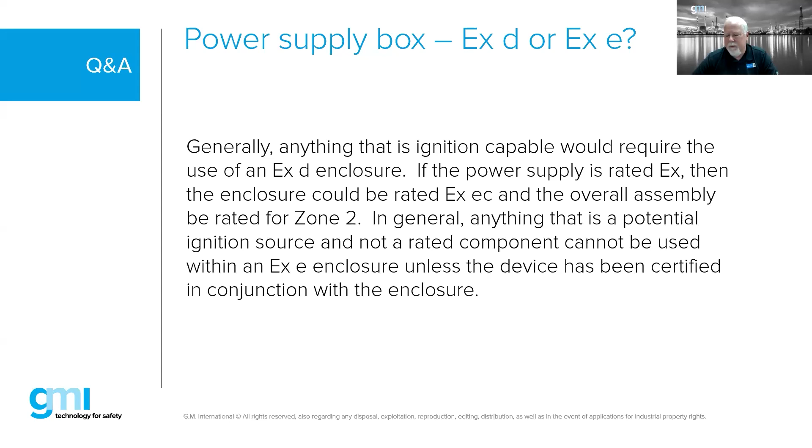And hazardous area protection most widely used? Well, that's a tough question. High power, typically it's usually Ex d or possibly pressurization. If it's low power, it's almost always intrinsically safe, but we don't have to use IS. When we get into Zone 0, we're pretty much limited to intrinsic safety or encapsulation. You get into large high voltage equipment, it might be oil immersed.

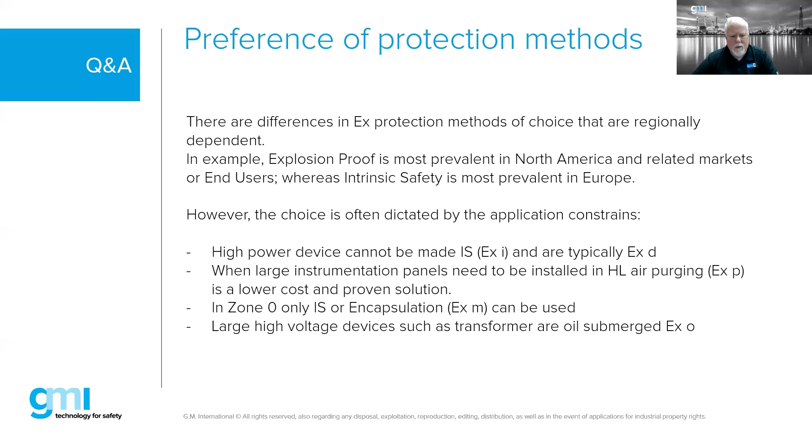So there's multiple different ways to look at it. The marketplace is definitely trying to get away from flame proof as much as possible and try to use other techniques, increased safety being one, or a combination of increased safety enclosures with flame proof components. That's certainly a great way to go. It's usually lighter, faster, cheaper. But in some cases, we're just limited to going with full flame proof.

So that's mine, I ran a little long. I know we started a little late, but yes, that was my fault. It's me. I can admit that. No worries, not on my behalf. So anyway,